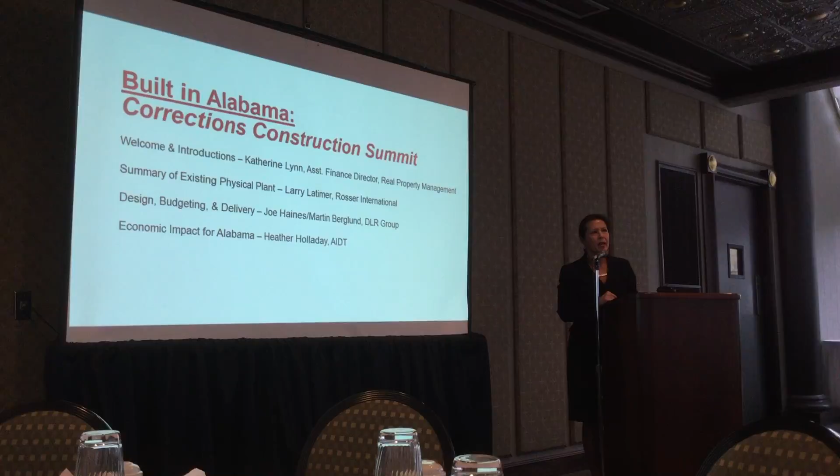So this is an opportunity for the construction industry, the design professionals, contractors, to talk about some of the issues that may have been where you may have lost some information or where there may be some misinformation. And I know there are a lot of questions. I've gotten questions from the legislators, I've gotten questions from the contractors, and so this is an opportunity for us to share information with you about the existing conditions in the prison, about different construction delivery methods, and about the economic impact of construction on the state of Alabama. So this is not an attempt to talk about anything other than to just share information.

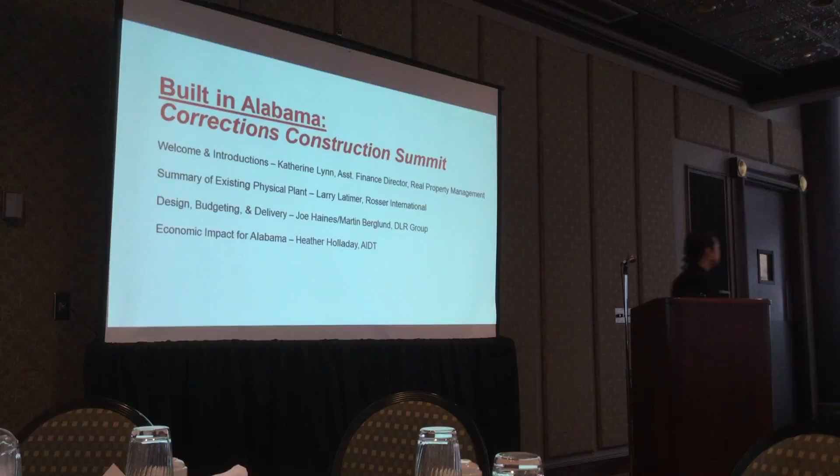Good morning, my name again is Larry Latimer, I work for Rosser International. In 2016, Commissioner Dunn requested the services of Goodwyn, Mills, and Cawood and the Rosser International team to do a condition assessment of your facilities. Over 4 months, we poured through every nook and cranny of those 17 major facilities in the Department of Corrections, logging thousands of man hours and writing reams of reports. Obviously it's very difficult to share that amount of information in a compressed format in the next 15 or 20 minutes, but what I'd like to do to accomplish that is tell you a story in pictures. I think the pictures pretty much speak for themselves, because I'm going to try to get out of the way and let you look at what is going on in the Department of Corrections facilities.

The issues that you're going to see in these pictures are systemic issues. We didn't pick the ones that were occurring only in an institution here and there. These things are happening at all 17 facilities of the Department of Corrections that we reviewed. Now, the conditions you see are related to the age of the facilities, the accelerated deterioration by severe overcrowding, inmate abuse of the facilities, inefficiencies of the original facility designs which have been outdated, and inappropriate building types for this particular purpose, for this kind of inmate population.

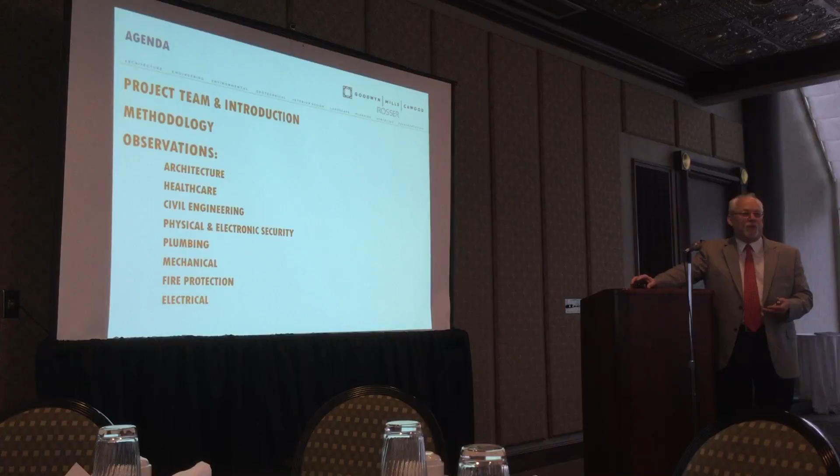There we go. Our methodology was pretty simple. We went to the facilities, we interviewed the wardens and the maintenance staff, we got their perspective of what's going on in their facilities. We then went through every room, every crawl space, every tunnel in those facilities to look at what was going on there and what the conditions were. Then we took the building documents the department possessed and reviewed those in light of code compliance, and that resulted in our reports.

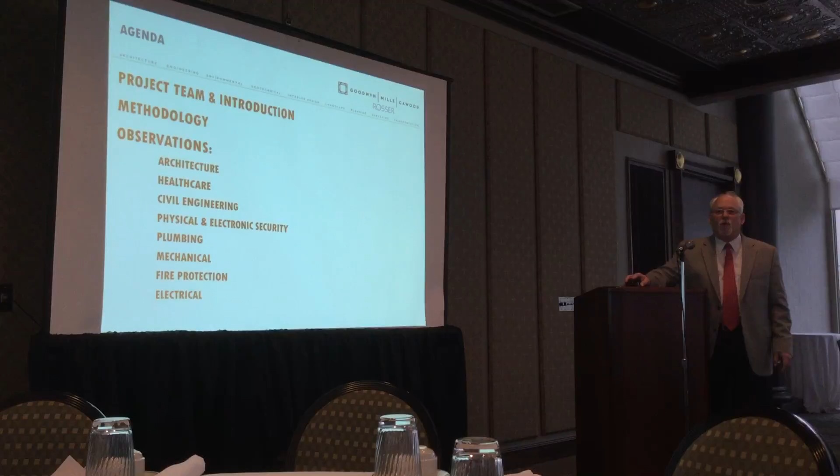We had 10 types of experts involved, many people, but you can see those experts that we involved: architecture, healthcare, civil engineering, physical and electronic security experts, plumbing, mechanical, fire protection, electrical, and one that's not listed there, where it was necessary, we brought in a structural engineer to assist.

I mentioned earlier that age is a big problem with your facilities. You have 6 facilities in this group that are 50 to 75 years old. Actually, Draper is going to celebrate its 79th year this year, 2017. There are 3 facilities in the 35 to 40 year group, and 8 facilities in the 20 to 30 year group.

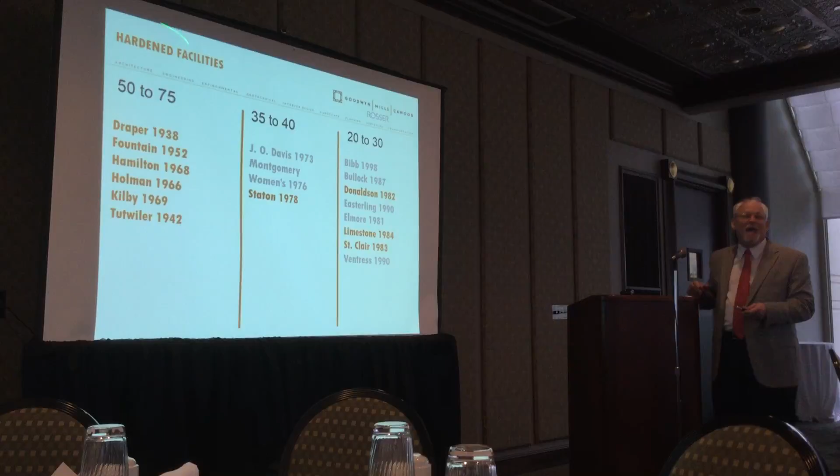Here's an interesting analysis. We started looking at the difference between hardened facilities versus non-hardened facilities - the use of heavy building materials for prison environments, as opposed to pre-engineered metal buildings that aren't really designed to take the abuse of a prison environment. We found the older facilities were predominantly built with hardened materials, and those are the ones that have lasted 50 to 75 years, well beyond what we'd normally call their useful life.

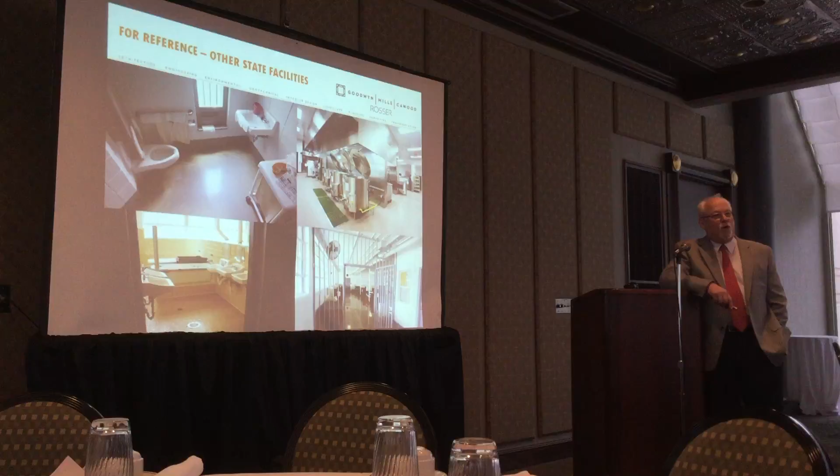Before I show you the photographs of the conditions we found in your facilities, I wanted you to see some comparative photos from other state agencies around the Southeast. This kitchen - I'll admit this is a photo of a kitchen brand new, about to open in Tennessee - this is what a correctional kitchen should look like. That's a thing of beauty.

This is a cell in a 26-year-old facility in Georgia, a medical facility. This is a restroom in a 59-year-old facility in Georgia, Men's State Prison in Milledgeville, Georgia. And this is the dormitory from that same unit.

I just want you to get a reference before we go into seeing the conditions we found in our study. Roofs are a problem statewide. You have a lot of metal roofs, and these metal roofs have lap joints - thousands and thousands of screw-affixed lap joints that have begun to leak over the years, and all of those leaks are ruining your interiors.

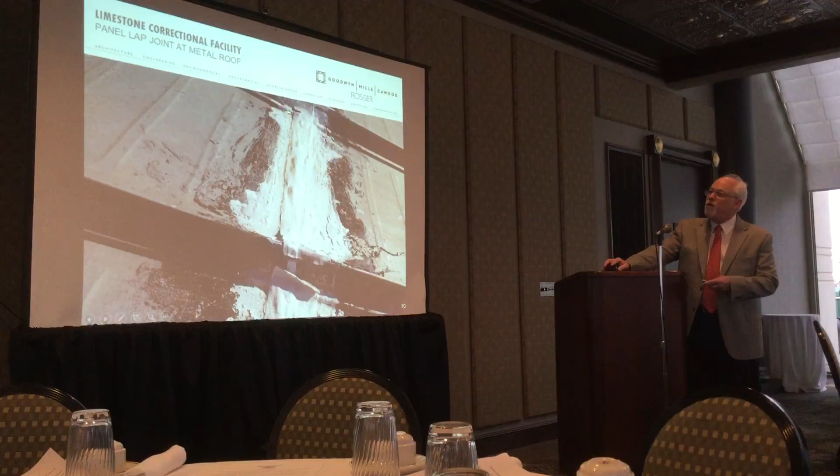Here's one at the same location where you can see they've tried to repair it several times. Every one of those little bumps you see along there are screws that are backing out of the top of the roof and causing leak problems.

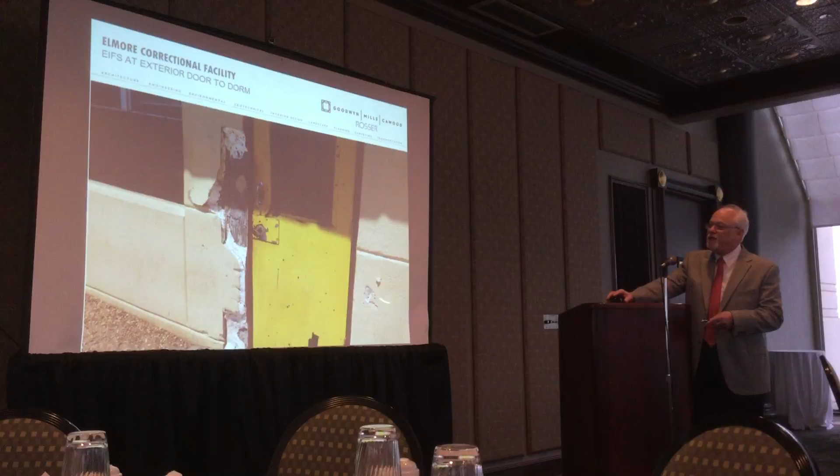Exterior envelopes show similar problems. This is an inappropriate use of material - a synthetic stucco material over insulation. You can see it's right next to a security grade door, and the inmates have just torn it completely off the side of the building.

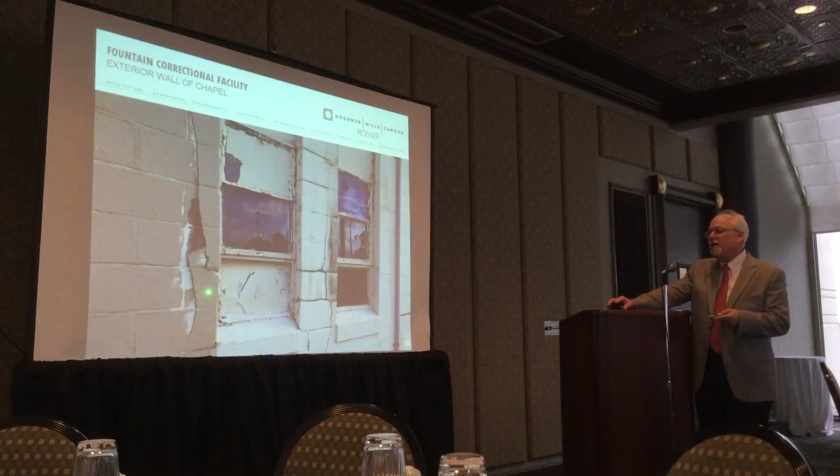This is at Fountain Correctional Facility, the exterior of the chapel. You're seeing all kinds of cracks in the CMU. We really question the validity of the structure of this facility. This is a close-up of the same area, showing spalling of the CMU and cracks going up through the structural components of the outside of that building.

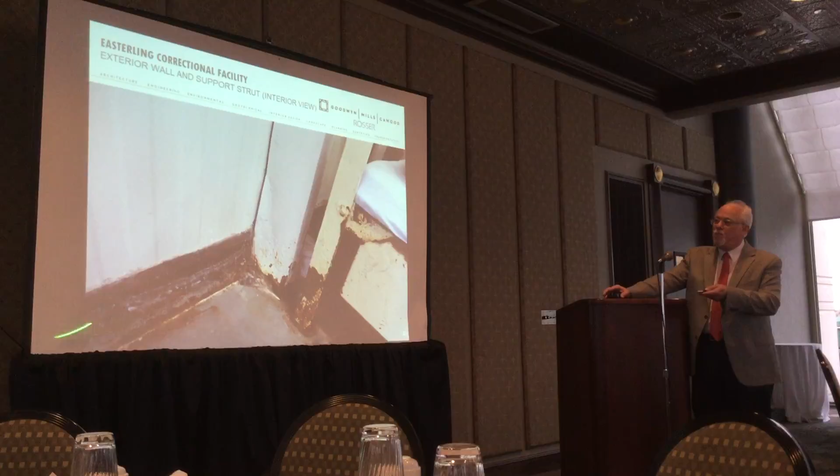Easterling, Ventress, and Bibb County are your three newest facilities, in the 20 to 25 year range. They're pre-engineered metal buildings, and you're starting to see complete deterioration of the base metal and the purlins. This is the outside of Ventress, where they put a security bar or screen over the window, knowing this facility wasn't designed to house inmates, so they added security measures, but the frame is almost completely rusted away.

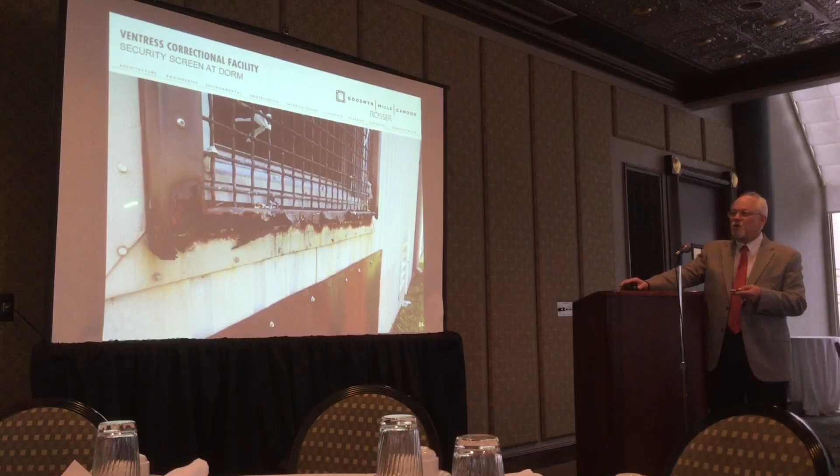A metal panel is down here where an inmate was able to bust through rusted sheet metal on the outside of that pre-engineered metal building. The inside of the same window structure shows the rust-away at the purlin there.

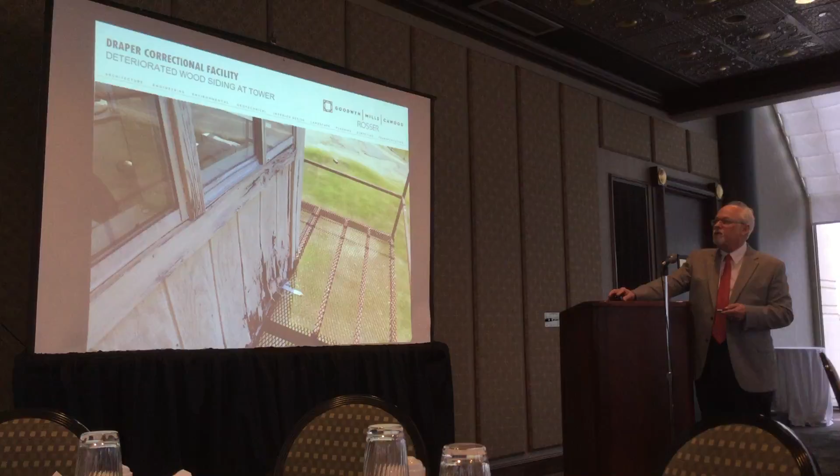Towers are a problem statewide. This is a Draper tower entry door, nearly gone from deterioration and rust. This is also a tower at Draper where they used a wooden structure on top of the metal deck. You can nearly put your foot right through that wall.

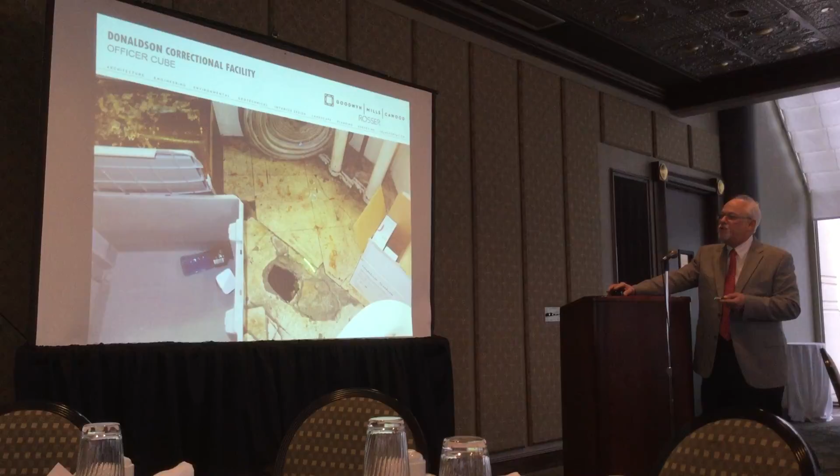Miscellaneous interior items, just for points of interest. We're seeing this kind of condition where you have a hole in your office floor. This is at Tutwiler, under the showers, where leakage through the concrete slab has caused the lime to leach out of the concrete. You can see exposed aggregate and reinforcing metal. That floor is a failing floor.

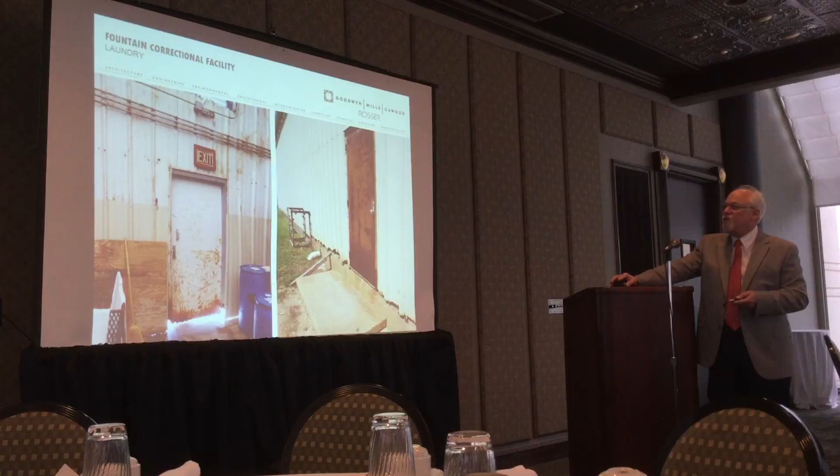This is another example of pre-engineered metal building problems. This is the laundry at Fountain, where the bottom edge of the sheet metal siding is nearly gone. There's also rusting away at the door. You can see daylight under the door and under the siding. The weather seal of that building is gone.

This failing of the floor systems is universal. Almost everywhere we're seeing that problem. Only one good kitchen in the state, and that was at Staton, because they built a brand new kitchen in 2010 there, and it's still in pretty good shape.

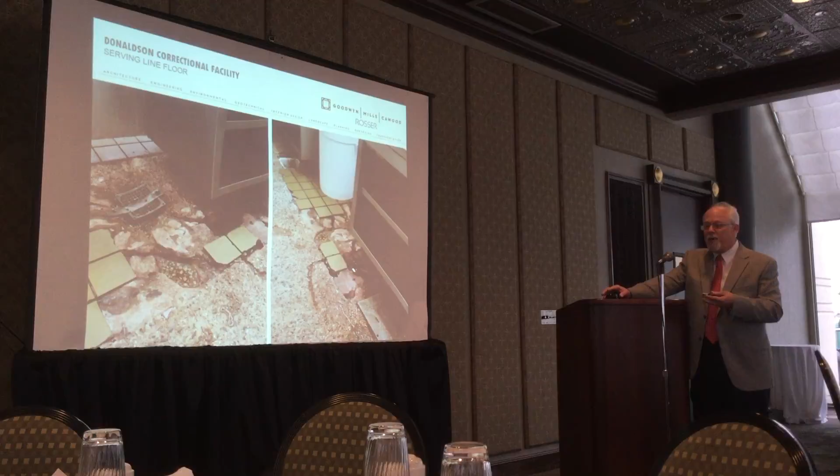This is another portion of the Donaldson kitchen. What you're seeing here is not just a failure of the tile system. You're seeing a failure of the grout base, and a failure of the concrete under the grout base. And what you're actually seeing here, though it's a dark part of the photograph, is the compacted soil underneath the floor itself.

This is another part of the Donaldson kitchen where the humidity and poor ventilation keep paint from sticking to the wall. Another problem in Donaldson - I don't know if you've ever seen a concrete floor wear out, probably haven't, but this is a condition caused by the high use of these facilities, the overcrowding demands, almost 24-hour operation of the kitchen.

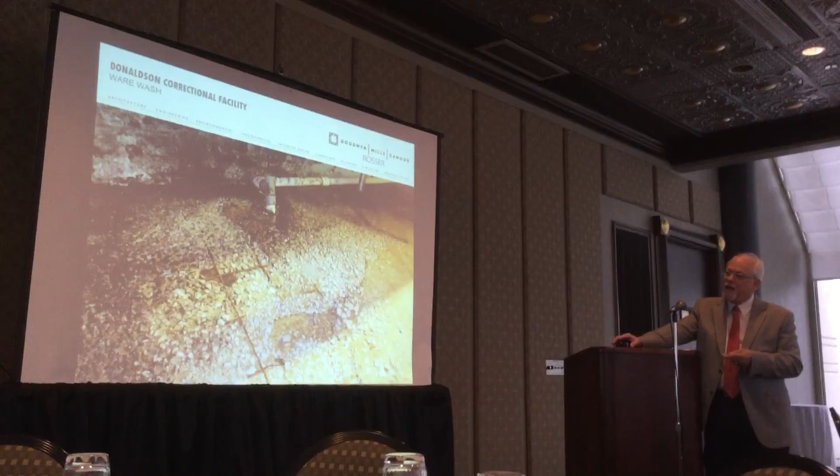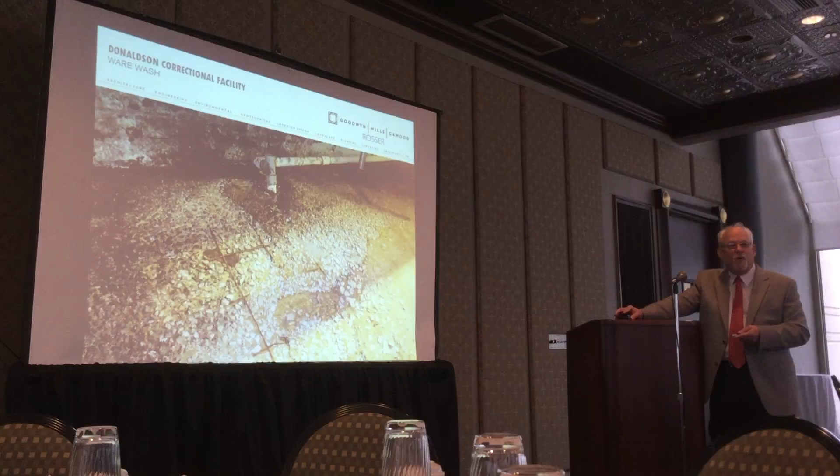This is in the scullery area, where the kitchen floor is so deteriorated that you're seeing reinforcing wire and aggregate exposed in this portion of the kitchen floor. A lot of age and a lot of abuse, more so than is normal for a facility of this size and type.

Kitchens at Draper have similar problems. You're seeing constant floor issues and failure of the floors. They have additional problems in that the drains on the floors are collapsed, so when they have water on the floor they have to use mop buckets to get it out. Here's a couple more shots of the Draper kitchen where the floor is completely gone.

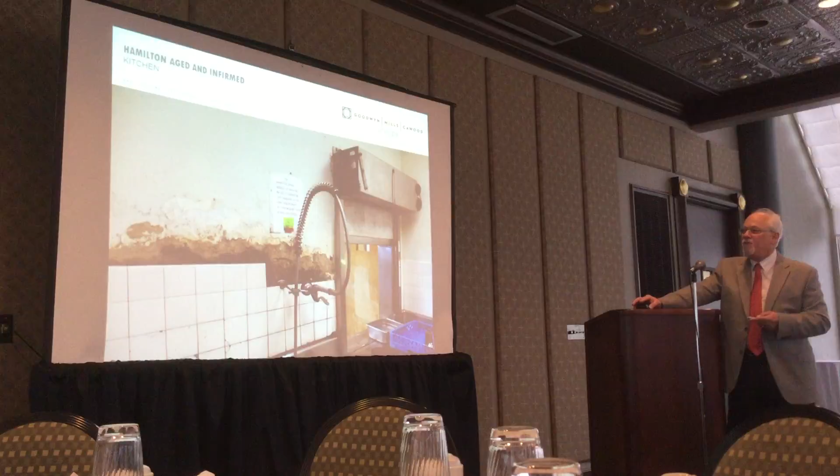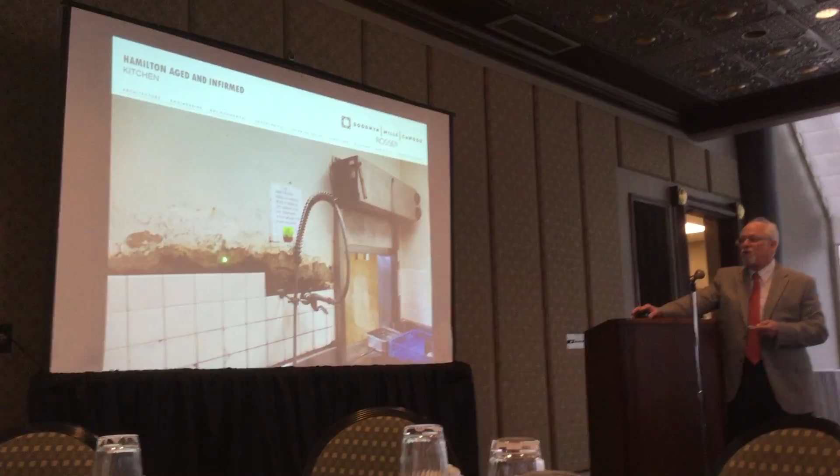This is at Hamilton Aged and Infirmed, where they've converted an existing facility that was really a care facility for the elderly. This is a sheetrock wall, and this wet environment has encouraged the growth of mold, with tile coming off the wall. This is glazed block at Holman that's literally falling out of the wall, in the kitchen area.

Just examples of floor failures in the toilets and showers around the Staton Correctional Facility.

Again at Staton, we're seeing pipe chases where vent stacks have been removed. We've got a leaking water pipe right here, and these two chases are filled with water in the bottom.

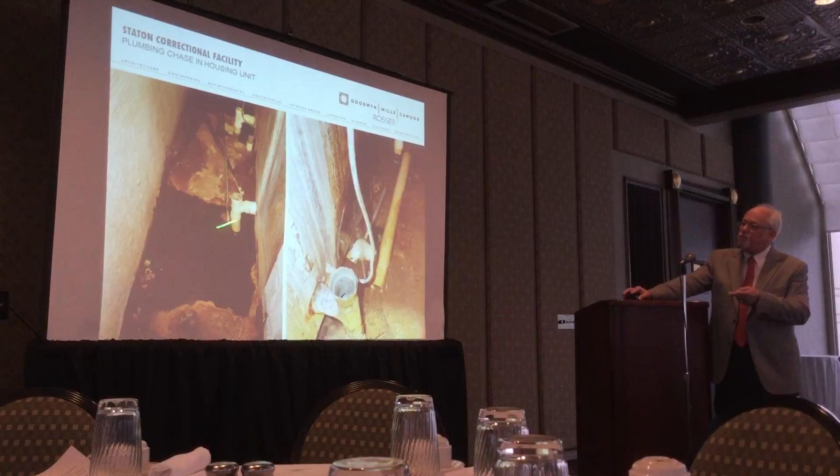We're having more floor failures here, with non-ADA approved fixtures. Here's the same thing at Elmore, non-ADA fixtures and floor failures at that location.

At Draper, they've given up on the plumbing in the wall and gone to surface plumbing, and we have a huge hole here in the corner of the pipe chase.

At J.O. Davis, you're seeing broken off shower heads. One thing you'll notice is that all of these fixtures are residential grade, so the inmates have no trouble tearing them apart. This is a notable effort to give extra support to vitreous fixtures in one of the facilities in Elmore, but now the support itself has become a problem because of the inappropriate materials used.

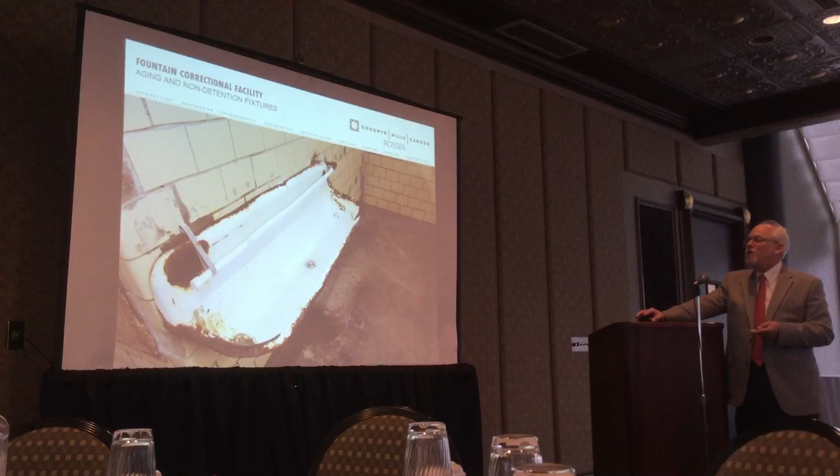This is an old urinal trough, no longer meets code and is in very rough condition.

Here we have a head that was broken off and a faulty shower valve causing water to flow at this facility in Fountain. Again in Fountain, a failure of these glazed blocks at the pipe chase.

Dormitories: Bibb, your newest facility, has significant roof problems. Right here in the dormitory we're having a failure of the insulation system due to roof leaks. This is a closer shot of the same thing, immediately adjacent to where those inmates sleep every day.

This is a conversion, and there are a lot of these in the state, where an existing industrial building was converted to housing. This is B dorm. It used to be an old canning plant, and this is just about 350 to 400 inmates in this one space. Another shot of the same space.

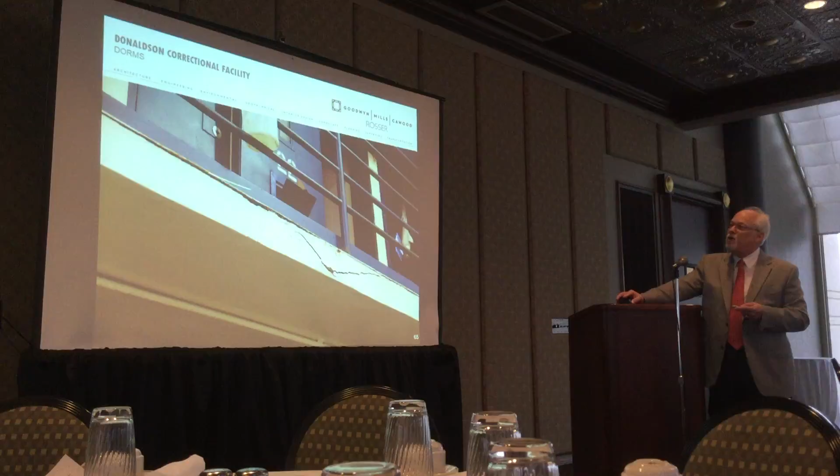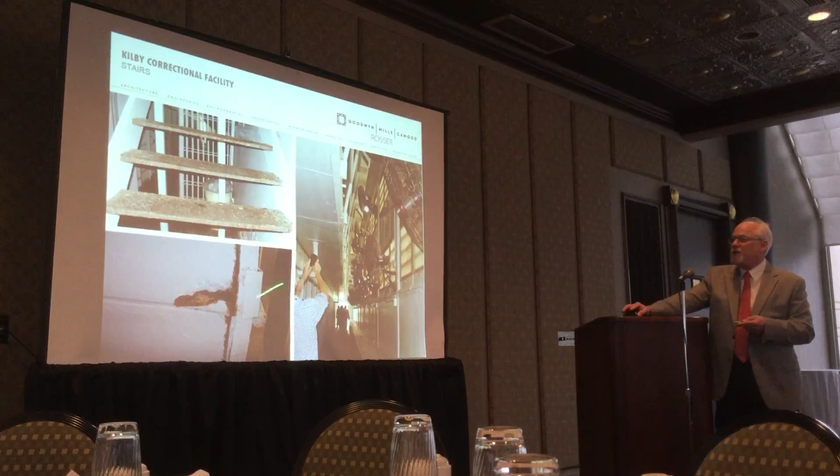Structural failures of the mezzanine at Donaldson, rusted stair treads at Kilby. We're seeing here along the edge of the mezzanine, we're starting to see failures. This is a close-up of this area right down through here.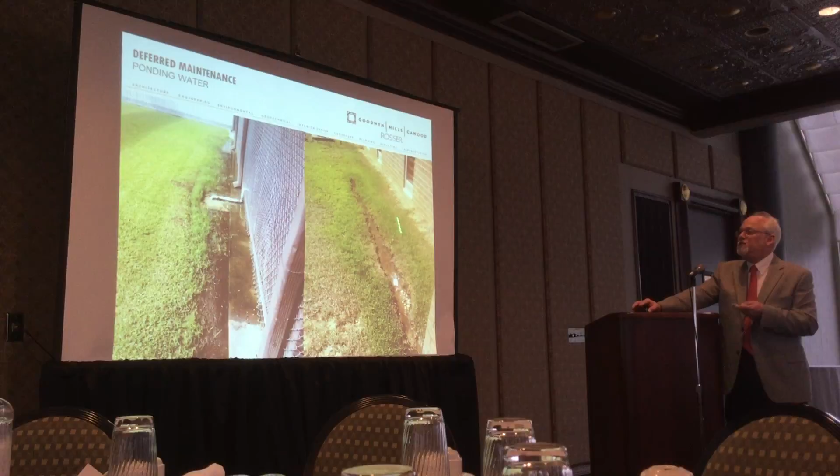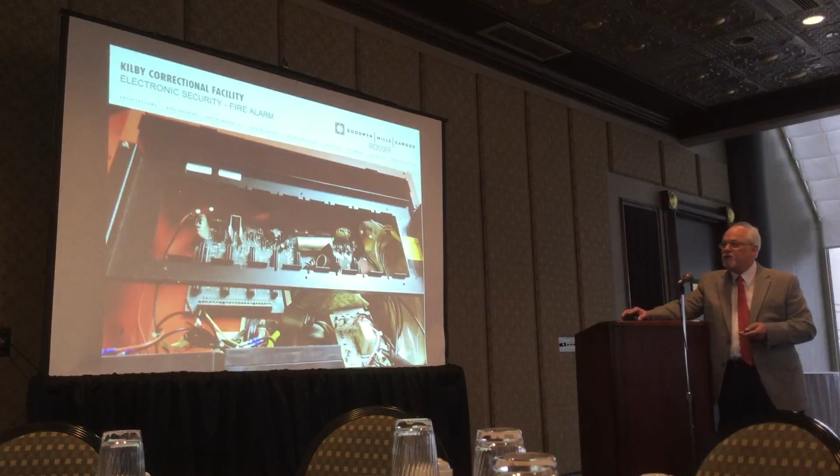Physical electronic security: this is a fire alarm at Kilby that's been long out of service and then scavenged. Of the 17 facilities we reviewed, we did not find a single one with a working fire alarm system. This is a serious code violation, a safety violation for inmates and staff alike. This is a control room at St. Clair.

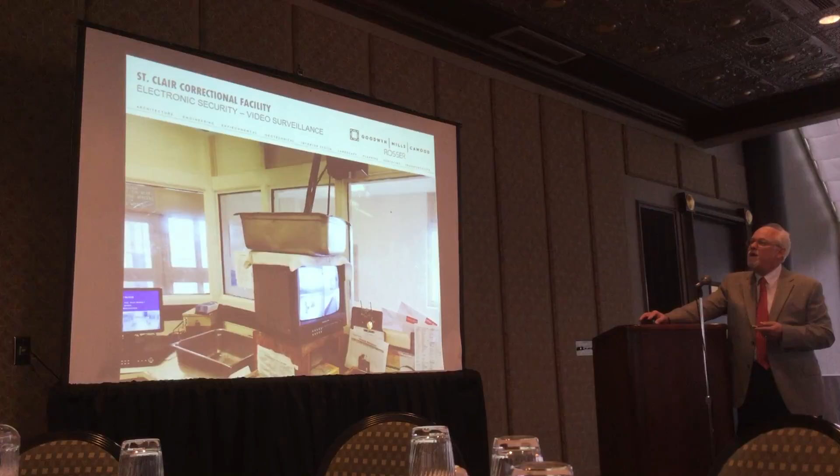Facilities have had to resort to using pans to keep control equipment safe from dripping roof leaks. This is the kind of condition that a lot of your locking control panels are in. They can't even tell what they're controlling, so they're adding notes to the panel. Here's another example at Bibb, your newest facility, where they've used a Sharpie to make notes about what they're controlling.

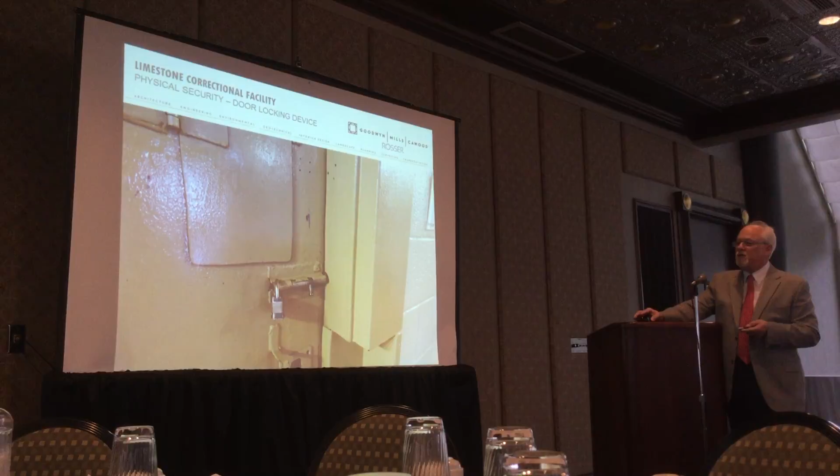This is a problem we're seeing nationwide, where inmates are learning how to defeat these locks. These are pretty heavy-duty locks, but there are a number of ways to defeat them, particularly if you don't have working control systems. So what they resorted to is using slide bolts with padlocks, which is a serious violation of the fire code. A similar situation where they used a grill door and padlock to do the same thing.

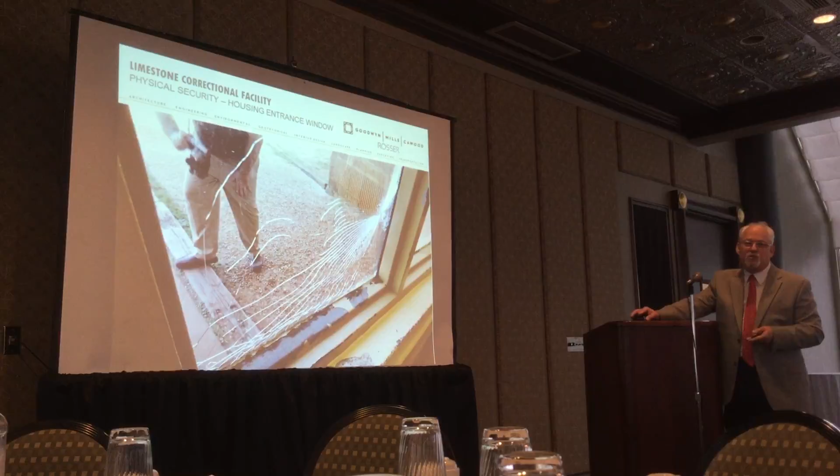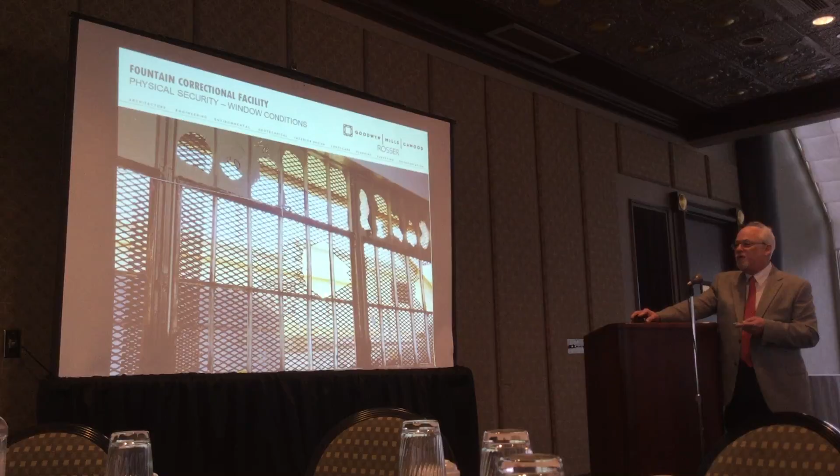You have a lot of breakage of security glazing throughout the state. This is an opening where they covered over with expanded metal mesh, and now inmates are tearing that apart, generally to make shanks out of it. Now for plumbing — we've gone through some of this, so I'm going to move through it fast.

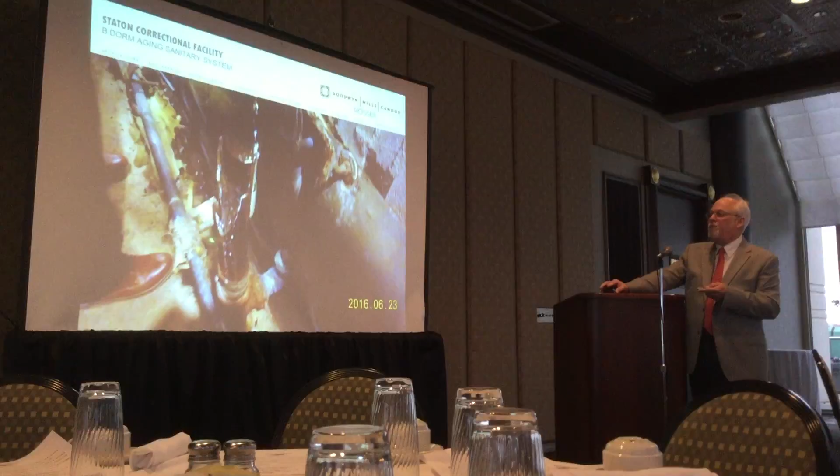This is a pipe chase at Draper, where all of the vent stacks have been removed because you can't get back to service the equipment without removing them, and naturally they don't get put back on. At Fountain Correctional Facility you see a hole in the sanitary line, and more holes in the sanitary lines at Kilby. Also at Staton, this vertical sanitary line is completely broken in two, and sewage is falling directly onto the floor in this particular pipe chase.

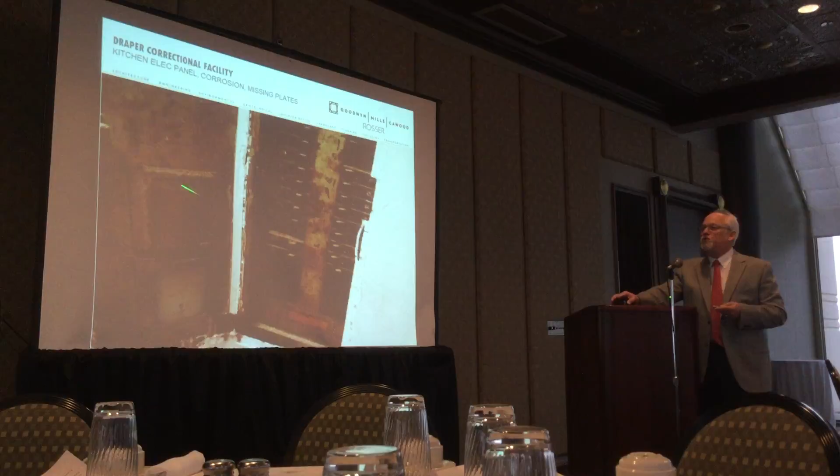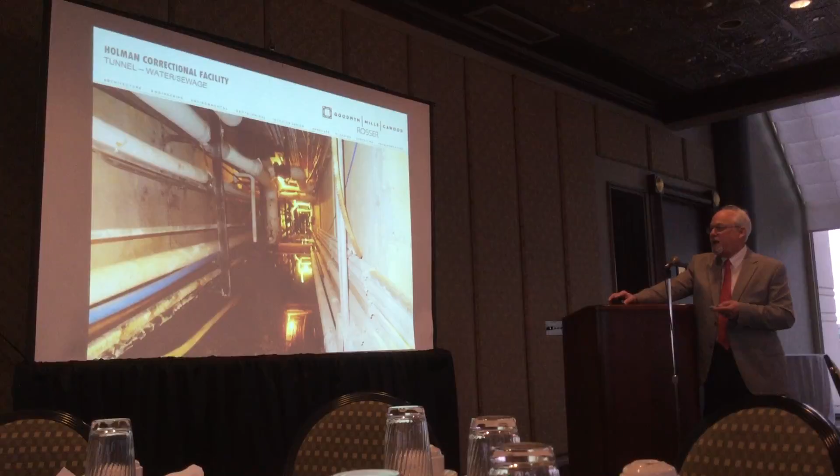Cost — you may be asking yourself by now, what would it cost if we decided to fix all of this? We've done a tremendous amount of work to arrive at a probable cost: about $450 million. By the time you were actually able to design and complete that construction, you'd be looking at costs closer to $500 million.

And let me tell you what you wouldn't get, even if you fixed all of that. You would not resolve your overcrowding issues, which would accelerate the deterioration of that new construction. You would not resolve your staffing inefficiency issues. You would not resolve your programmatic deficiencies statewide, and you would not resolve the unwholesome atmosphere in which you're asking staff to work, which contributes to your issues attracting staff. Thank you for your time.

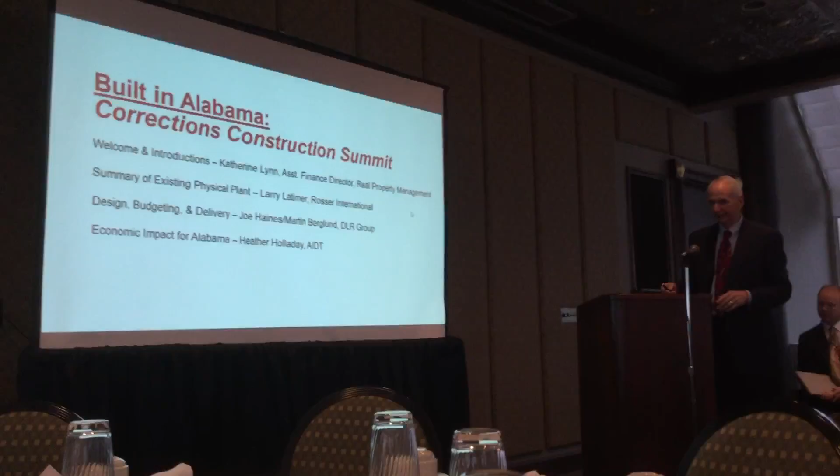At least I don't show it. Make sure I get this working. Carrie's going to help me if the clicker doesn't work, or if my mic isn't working. I usually talk loud enough that I don't need the mic.

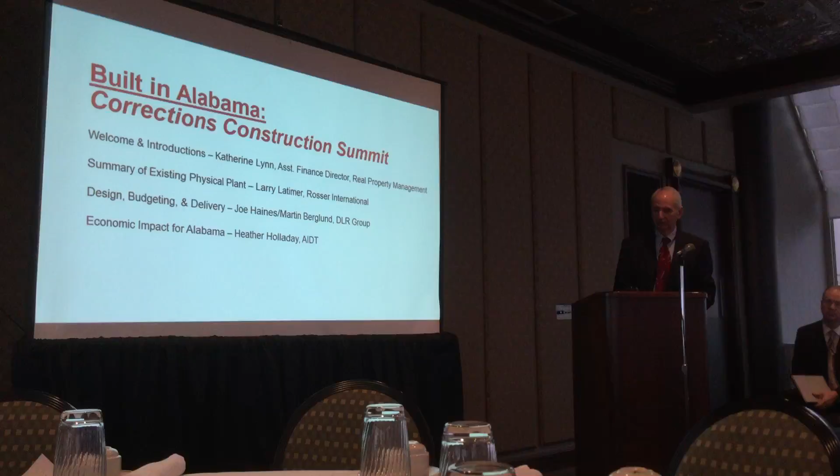What we wanted to do in a very brief time is give an example of large-scale prison projects that we personally have been involved with for different clients: federal government, state governments, and even the private sector.

I'm not sure to get that working, Eric. Is it right? Go ahead, I'll do it.

Four parts to this: a brief introduction about myself and Martin and our background, three examples of large-scale prisons, a very brief discussion on putting budgets together for projects, and then a very simple discussion on the delivery methods.

I noticed that a representative from DBIA is handing out some very detailed information. Martin and I are very familiar with DBIA. We're both certified professionals, been through the training program for design-build projects.

So I'm going to start out with who we are. My name is Joe Haines. I'm an architect with DLR Group and have significant experience majoring just in this building type.

Martin, who has over 20 years, he and I work together. We work for DLR Group, a large AE firm, nationwide practice with a specialty in criminal justice projects. Martin and I happen to specialize in prison and jail construction. We're familiar with designing large-scale prisons and have been for a long time.

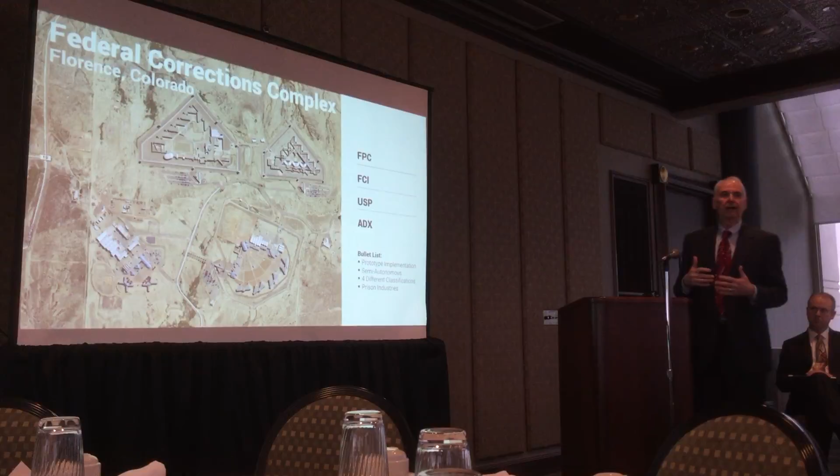I'm going to start out with a federal project. Back in the early 90s, the Federal Bureau of Prisons retained our firm to develop a new concept. They wanted consolidated facilities where they had all of their classifications on one site instead of being spread out. They saw the economies of scale associated with this, and the opportunity to do shared services and bring forward cost savings in their prison construction program. So we were retained to develop this prison site in Colorado.

It's about 600 plus acres, but it has the administrative maximum security facility. I'm going to use the pointer. A camp, medium security, a penitentiary, and the Supermax. You've heard it called the Supermax, a replacement for Alcatraz. This is the one-of-a-kind, worst of the worst Bureau of Prisons inmates they have to deal with, and there's only one of these built in the U.S. at this point in time.

So we created prototype designs and site planning for this in a macro sense, large-scale consolidated. So they have a prison camp. Now this is low security, essential services, industries. These are the inmate workers that work in the other facilities. So they're on the site, they're close by, but it's a low security, no fencing associated with that for that particular classification.

Now you go up to the Federal Correctional Institute. That's a medium security facility. Like Aliceville, you have one here in Aliceville, prototype design. You'll see it's campus, housing ringed by central services and a perimeter fence. Very standard in the FBOP prototype design. They've replicated these in many different states across the country.

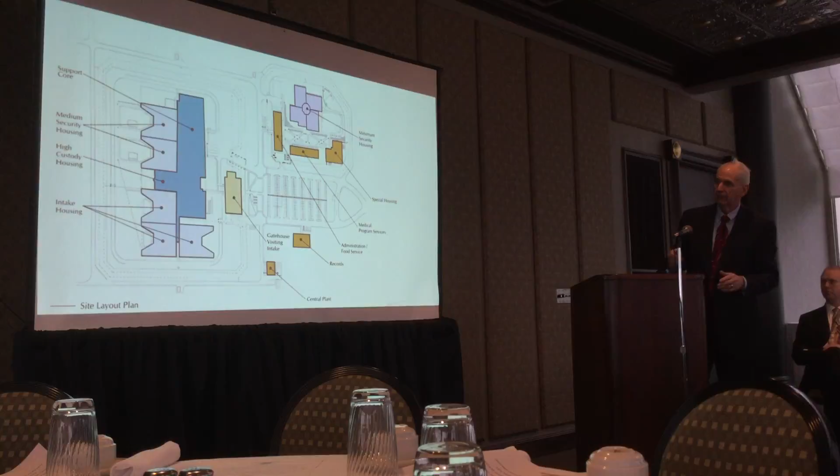That was a difficult and challenging site. Some economies of scale that came into play to save money was to have a compressed design. These housing units are all close together, with support facilities on the other side of a central corridor that's enclosed, so inclement weather is taken care of and nobody has to move outside in a rainstorm. Their minimum security compound, which has all the central services and support workers for this facility, is outside the compound but close by.

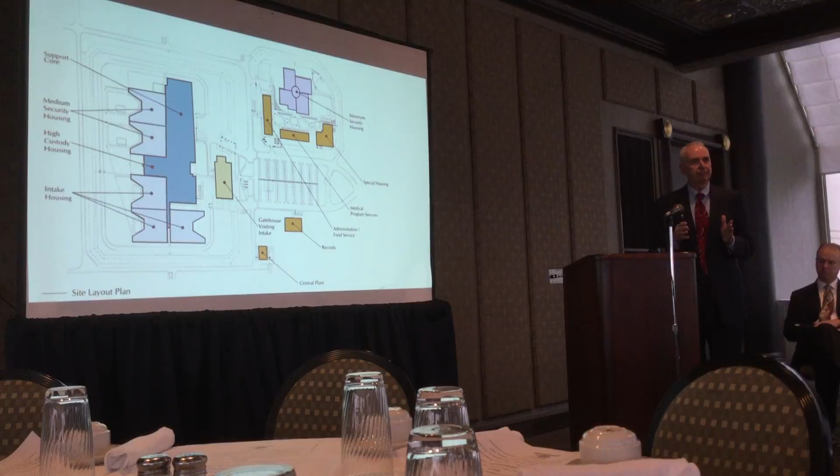So this was our solution to their request to have a small site. They had expensive site development costs, and to minimize construction of perimeter fencing and building perimeter, we came up with this particular response for the state of Oregon for their females. It doesn't mean everybody does it this way, but it's an example of large-scale economies associated with bigger prisons for a specialty population like females.

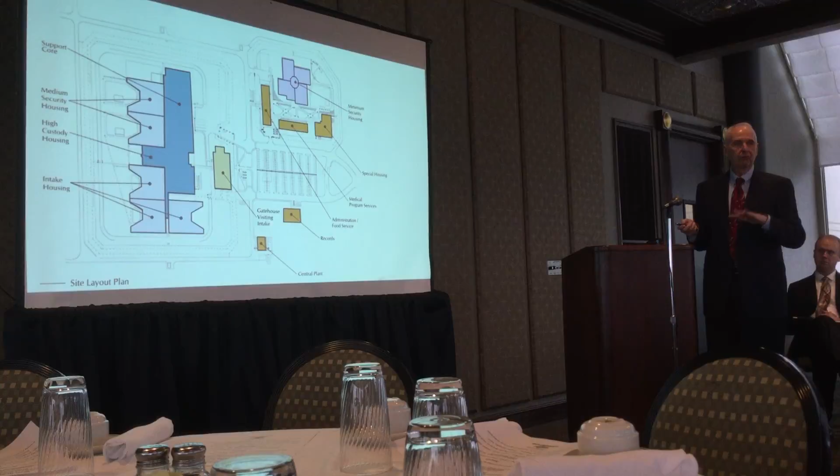The third example is a project we were retained for. It's a private sector project, but the people held in this facility are state of California prisoners. This particular project is large scale, 3,200 beds, with some significant design parameters in that it's created in three different phases.

I'll go to a site plan. There are three compounds, and it was constructed on an accelerated schedule because the client who was going to use this space had a date specific for occupancy. So the design and construction team scheduled things so they could occupy these 1,000-bed compounds sequentially to meet a ramping up of inmate delivery from their client.

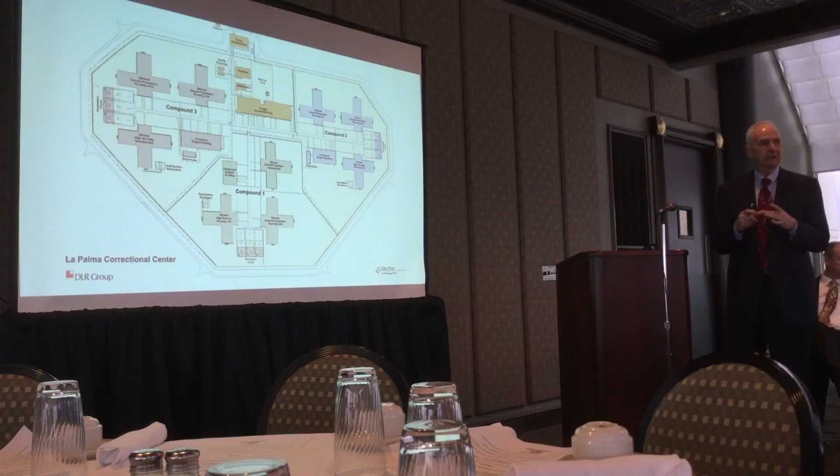But it does have some central services and some semi-autonomous shared services. It's a relatively compact site, but decentralized, so you can have different classifications in this compound, this compound, and this compound, while still having the economies of a smaller site around a singular entity.

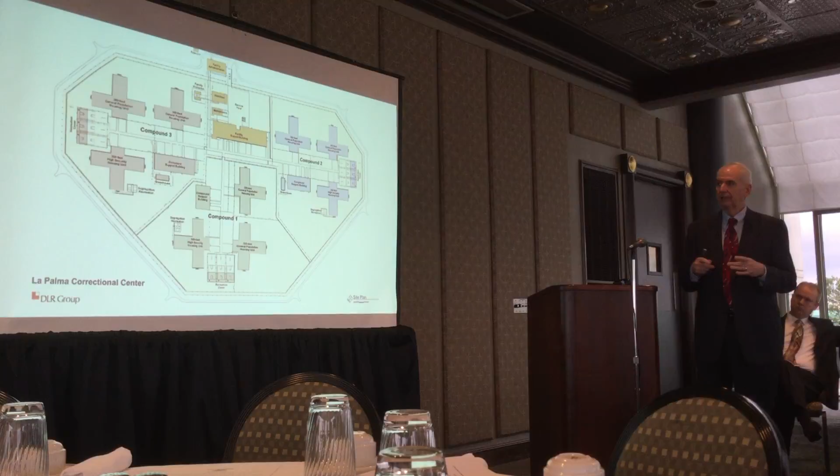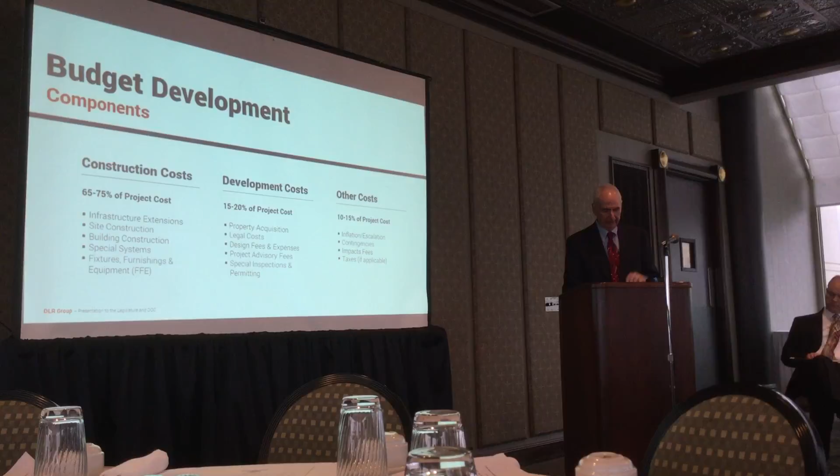Some considerations you may be looking at for your potential prison program: developing a budget. This is a very sensitive topic, because when you appropriate money for a building program, you only have one bite of the apple. So developing a budget, you have to be aware of the different components—it's much more than just construction cost.

Yes, that's what you see compared—that's what it costs to build this facility here. But as you appropriate money for a project, whether it's state, private sector, or federal, your project costs are over and above your construction costs—property acquisition, legal costs, professional fees, and all other kinds of things come in there. So when developing a budget, be aware there are more components.

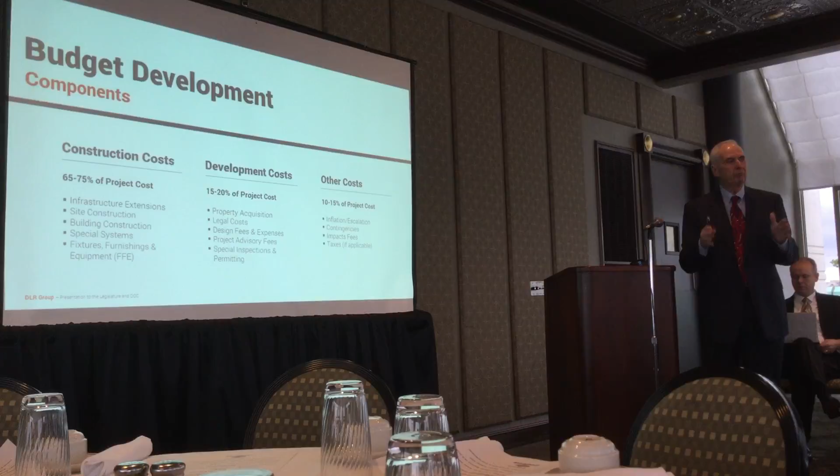So when you make an appropriation or get a budget approved, it has to include all these costs, and you really can't go back and ask for more later because you forgot this or that. So we're just making sure that when developing project budgets for large-scale projects or any building program, you're aware of all the costs associated with it from beginning to end.

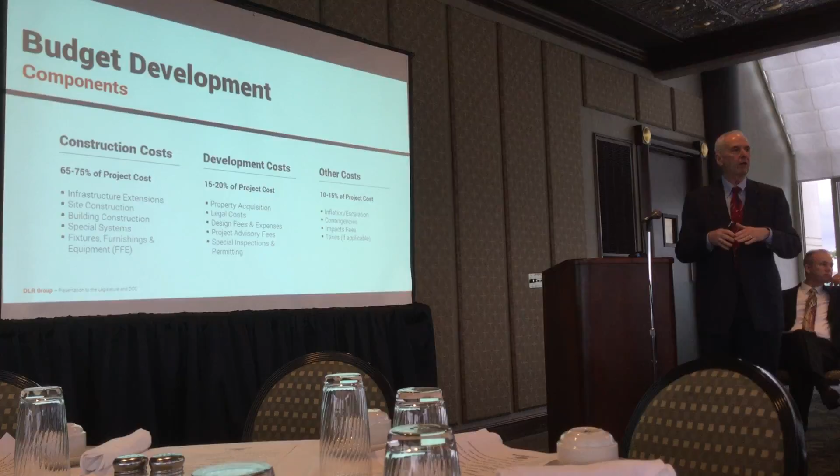I'm going to have Martin go over some very brief project delivery aspects. I know DBIA has distributed a handout with much more detailed information and statistics about the design-build project delivery method compared to other delivery methods.

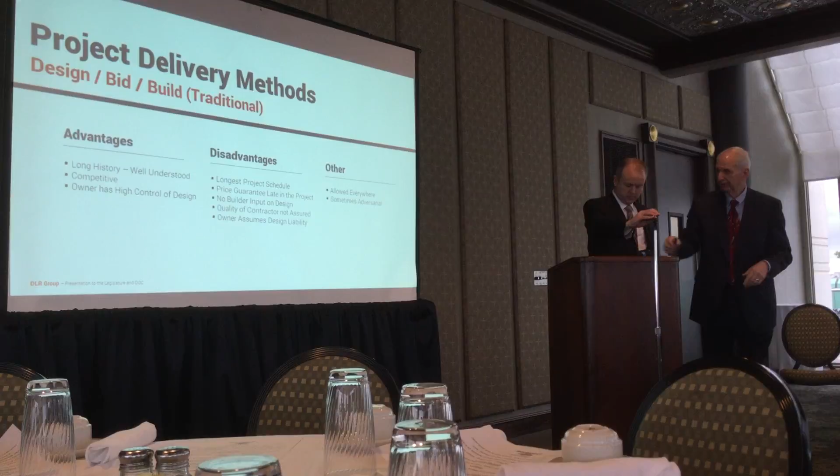Thanks, Joe. You need a pointer? No, I'll be good. I'll be good without a pointer.

We've been asked to talk briefly about a couple of different delivery methods of how you can go about starting your project to completion.

The most common one is still the traditional design bid build, where the owner retains an architect. The architect works with the owner and develops a program and a design and takes the design to completion to bid documents. Then the project goes out for bid. Really any contractor can bid on the job, and the lowest bidder gets the project.

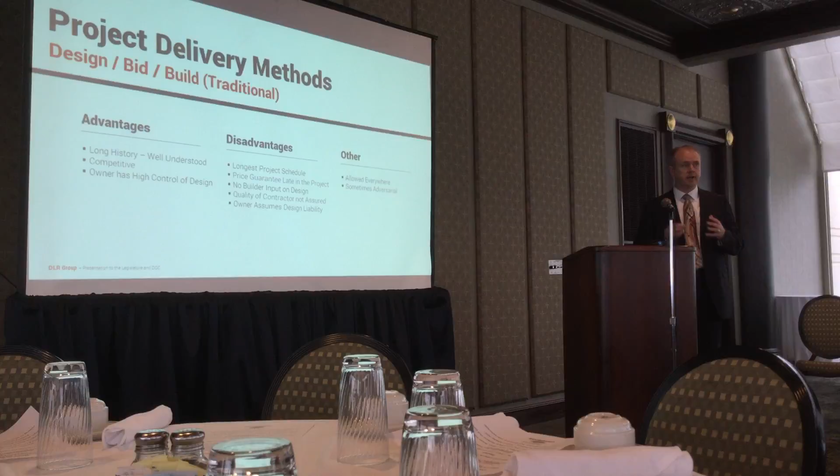Some advantages of that: it has a long history, it's been around forever, everyone knows how it works. It's competitive because you're competing on price. And the owner has high control of the design because the design is fully developed by the owner's architect before bidding the job.

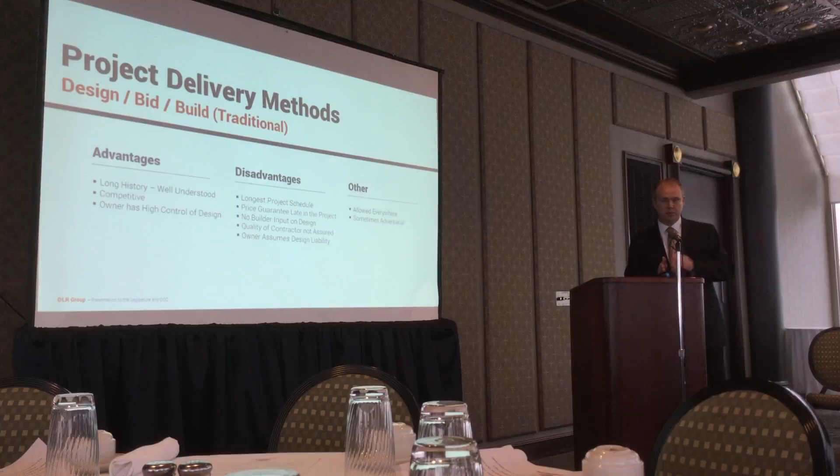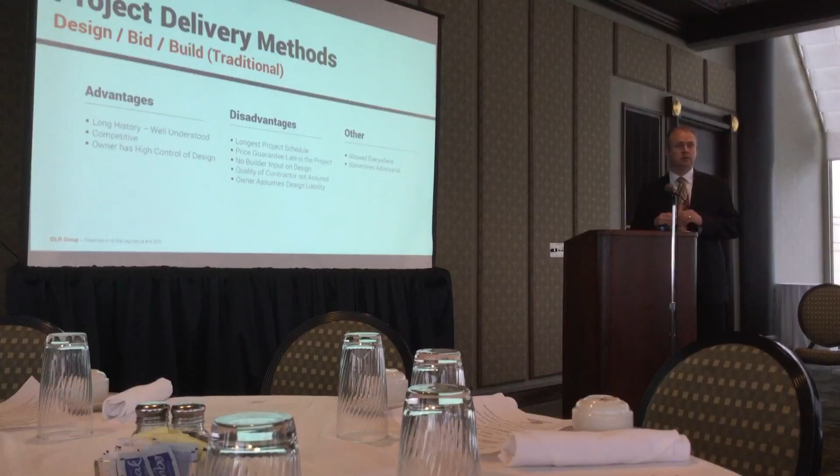It can take a little longer because the job has to be completely designed before construction can start. There's also no builder input on the design, because the architect is working based on his experience and does not have access to talking with contractors who can provide input on how best to build things or come up with solutions.

You have no control over who the contractor is going to be. It stipulates the one with the lowest bid gets the job at bid day. And then I'll talk about design build,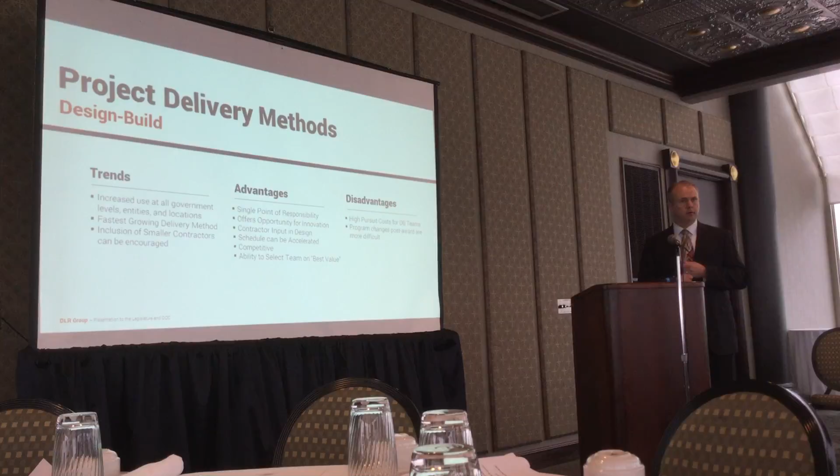which is kind of the fastest trending delivery method currently. It's been growing all over the country, and a lot of states have now passed legislation where design build is allowed. I don't know specifically in Alabama — I don't think it may be allowed yet, but I think they're working on it.

Here you have several advantages. You can encourage the inclusion of small businesses, minority-owned businesses, or locally owned businesses as well. There is contractor input on the design because the contractor and the designer, the architect and engineer, work together as a team.

Another benefit is that there's only one point of contact for the owner. The owner signs one contract, whereas in design bid build, they would have a contract with the architect and a separate contract with the contractor.

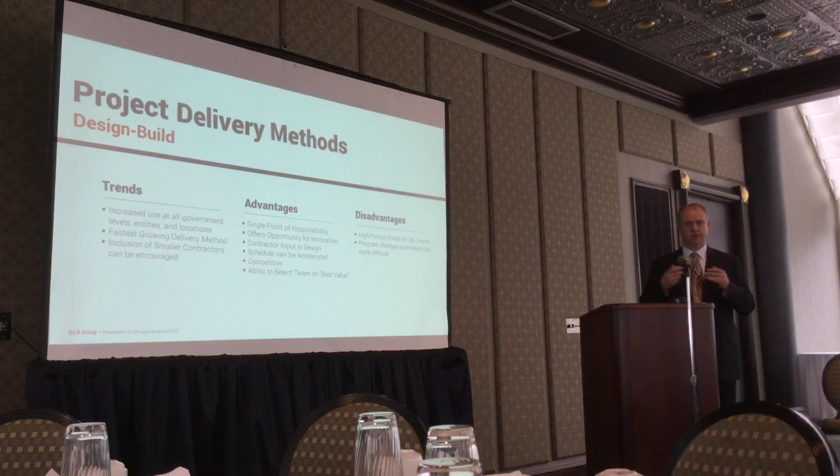It also offers good opportunities for innovation because these design build teams of architects and contractors are competing against each other, so they have to come up with different solutions to the same design challenge.

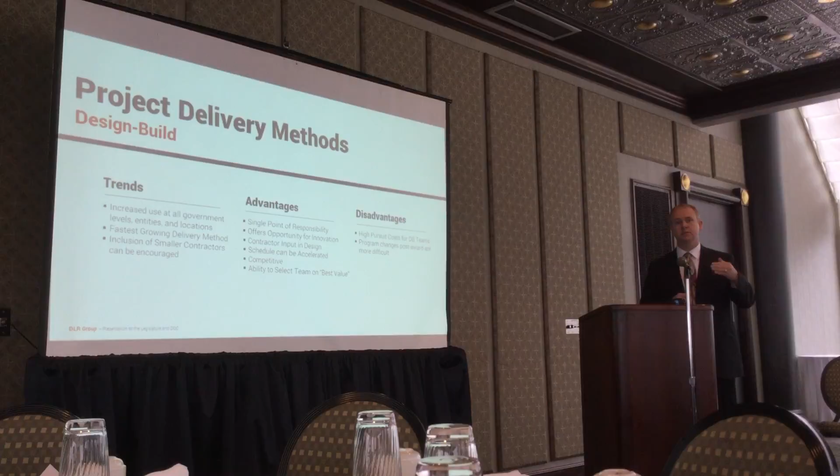It gives the owner the ability to select based on value. They don't necessarily have to take the lowest price because they're also grading these teams based on their qualifications and past performance.

Some disadvantages to design build: it's relatively expensive for the design build teams to compete. The architect has to take the design to a pretty decent level for the owner or contractor to develop a price. It can also be a little more difficult to change things once the project is underway.

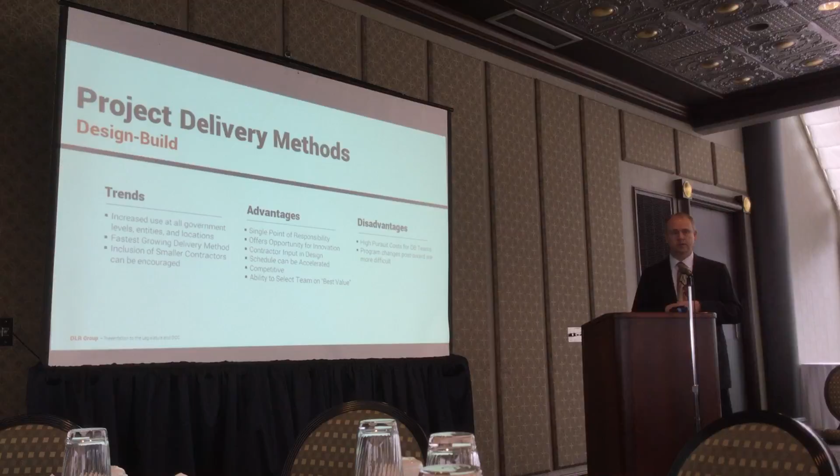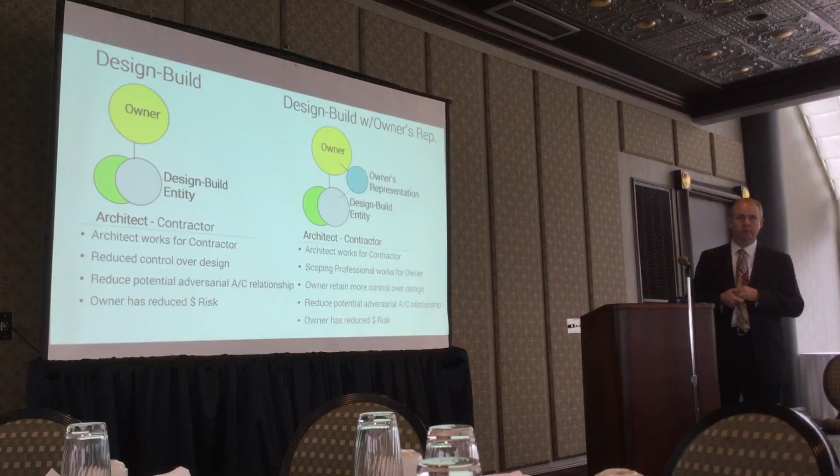Here's a little bit of how it works. In the graphic on the left, the design build entity, which is the architect and contractor, has one contract with the owner. This is kind of the purest form of design build, if you will.

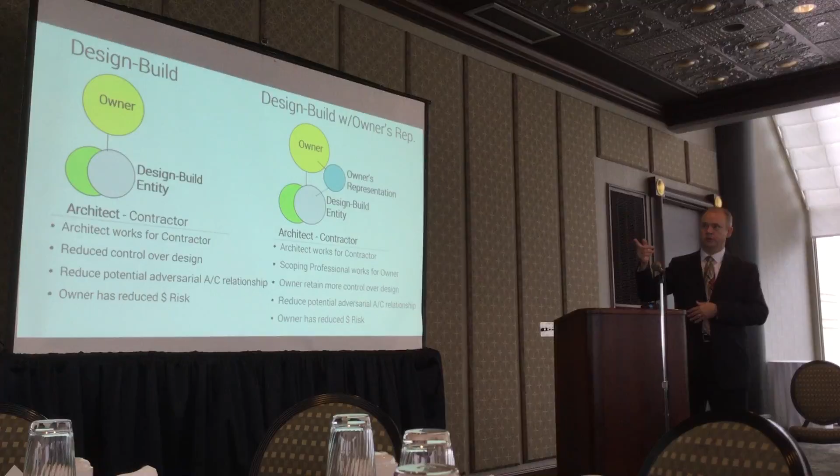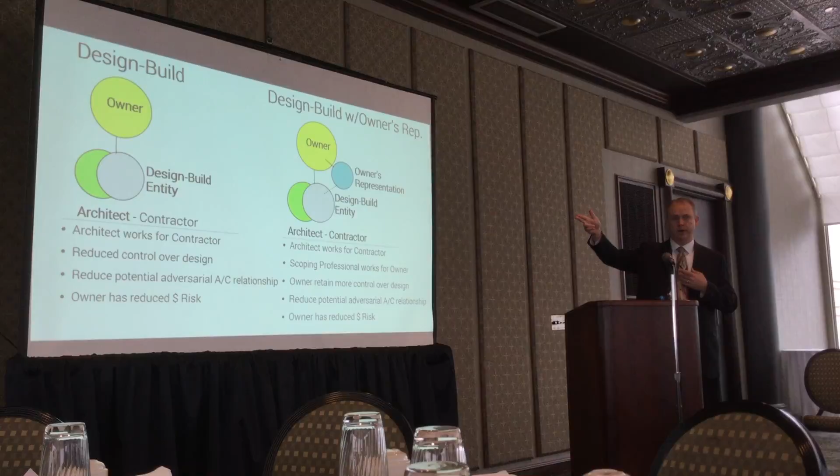What we see more and more, especially on larger, complex projects, is where the owner retains a separate independent owner's rep — a consultant who helps the owner look out for the owner's interest. So the design build entity will still be the contractor and an architect of record, but the owner has an owner's rep who develops the specifications for which the design build teams are going to be bidding.

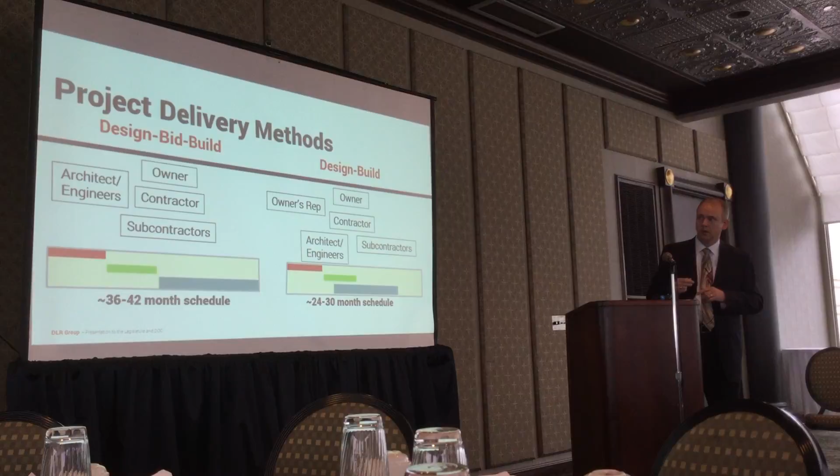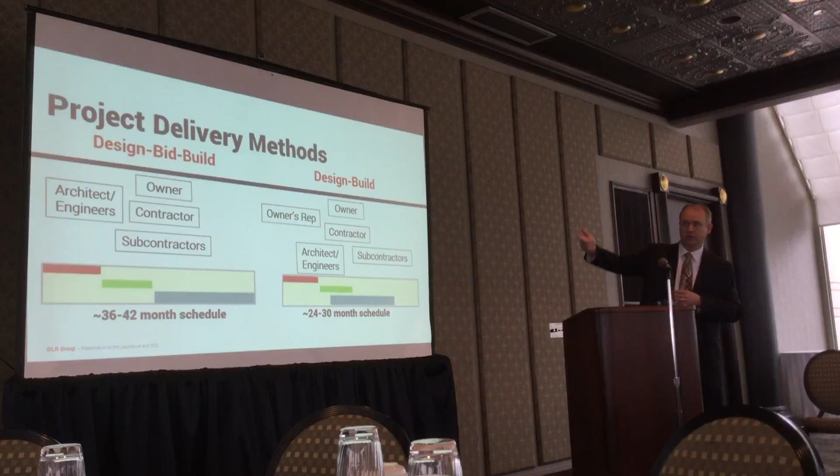This graph tries to show some of the schedule advantages of design build versus design bid build. The color bars are conceptual: the red would be project development or design, the green would be project design. As you can see on the left side, you can't start construction, the blue bar, until the design is completely finished.

Whereas with the design build method, construction can actually start before the design is completely finished, giving you the ability to tighten up the schedule of the project.

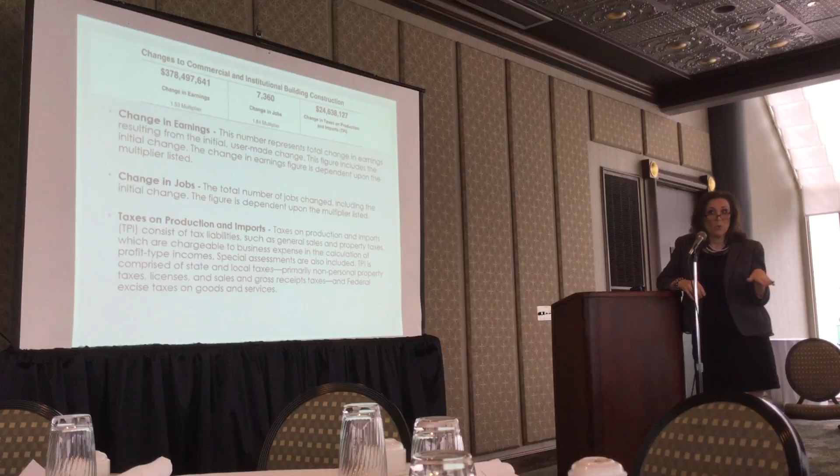Change in earnings: if we add 4,000 jobs, that first block shows the change in earnings, millions of dollars impacted across the state. The second figure is 7,360 - adding 4,000 jobs basically adds another 84% indirectly, directly, and induced across the state. That 1,068 jobs lost on the first screen won't exist - that loss was only if we do nothing and don't add any jobs anywhere. This is inserting 4,000 jobs to construct prisons and the impact it'll have.

Change in earnings, broken down a bit - you heard me say direct, indirect, and induced. When you initiate 4,000 jobs, the initial impact is almost $250 million across the state. Directly, because you included that $247 million, those 4,000 people will start shopping, eating, vacationing - directly impacting another $42 million on top of that.

Indirect - remember, they've got to eat, shop, have vacations. Indirectly, you're going to impact several other industries across the state at a figure of $11.4 million. Induced means that since you've impacted direct and indirect, induced comes because you've got to have a delivery service deliver packages to those citizens - multiple industries get impacted. Induced, you're looking at $76 million impacted.

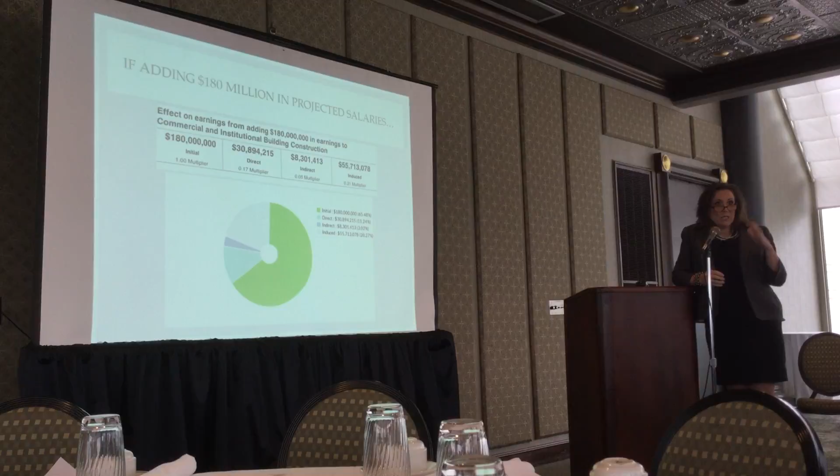Like back at the first screen where we talked about tax dollars being lost, here they're gained. Remember, we're looking at one industry - there are multiples that will be touched. Adding 4,000 jobs to one industry, you're looking at almost $10 million in local taxes across the state, almost $9 million in state taxes, and $6 million in federal excise taxes on goods and services. In that $800 million budget calculation, if we're adding 4,000 jobs, about $180 million covers the labor cost.

So if we add $180 million, I was just playing around to see what would happen - you'll add directly another $30.89 million to those salaries. Indirect, $8 million will be impacted. Induced, $55 million, almost $56 million.